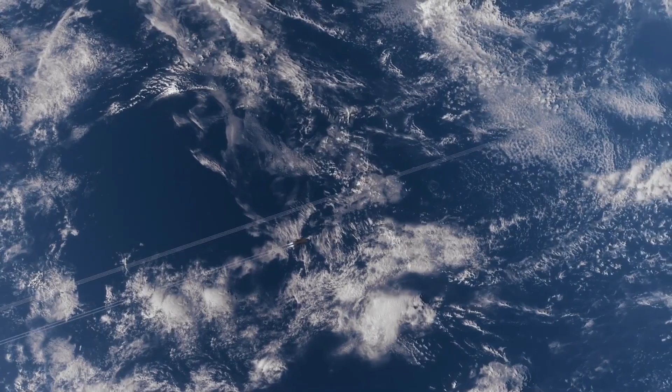Imagine blasting across the Atlantic in under 90 minutes, or jetting to the other side of the planet in just a few hours. It's the kind of travel you'd expect to find in a sci-fi film, but it's closer than you might think. Hypersonic technology that will have us covering vast distances at mind-bending speeds is more than a dream. It's on the verge of becoming a reality.

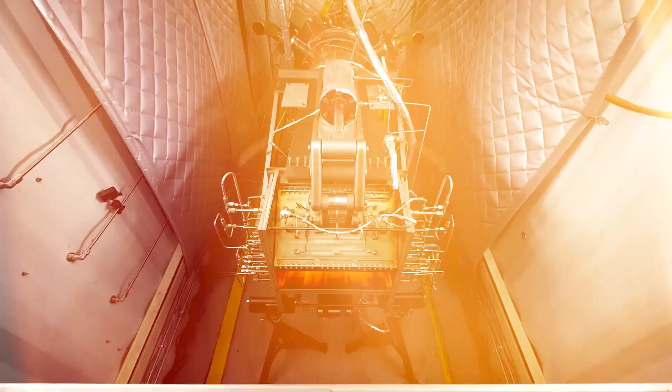Aviation pioneers like the Concorde once brought us closer to the concept, and ambitious plans like the Boeing 2707 hinted at it. Now, Hermeus, a company few have heard of until recently, is taking hypersonic to new heights with its revolutionary engine, the Chimera. Buckle up as we check out the technical wonder that is the Chimera and the game-changing impact it could have on aviation, travel, and even national defense.

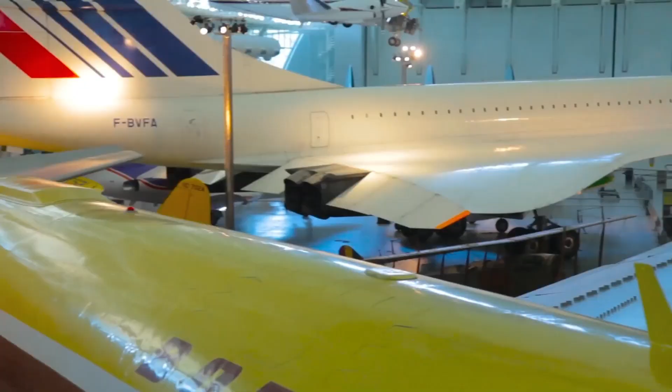The supersonic Concorde was a technological marvel in its day. With flights cruising at Mach 2, it drastically cut transatlantic travel time. However, the Concorde had limits, many of which stemmed from its own technology. High operational costs and low efficiency ultimately grounded this feat of engineering.

Meanwhile, in the 1970s, Boeing took a stab at the next frontier with its 2707 project, a concept for an American supersonic airliner that could reach Mach 3. Unfortunately, the 2707 never left the drawing board. But despite these setbacks, the dream of hypersonic flight lived on in the minds of engineers. Now, Hermeus has taken up the challenge.

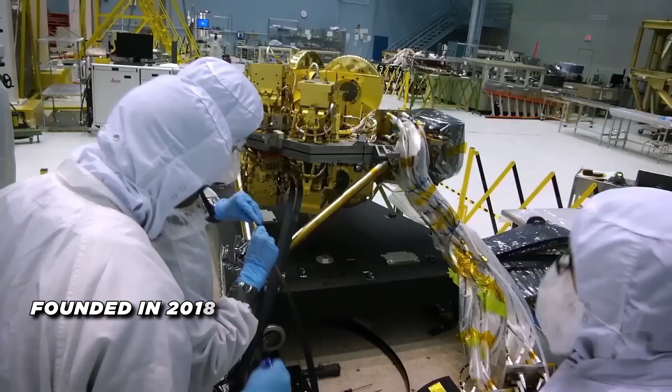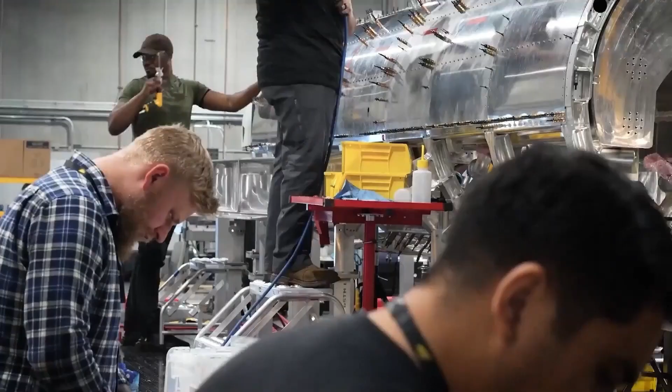Founded in 2018, Hermeus brought together a group of experts from aerospace giants like SpaceX and Blue Origin. These innovators weren't satisfied with small steps. They wanted to break new ground. Their solution? The Chimera Engine, a turbine-based combined cycle, or TBCC design that's practical, powerful, and groundbreaking.

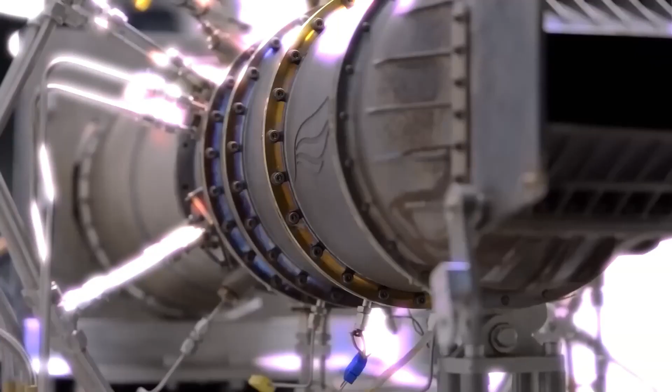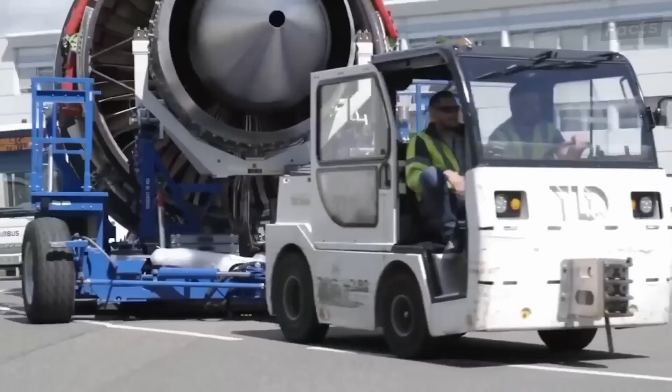Unlike experimental engines such as the scramjets used by NASA in aircraft like the X-43, the Chimera builds upon jet engine technology that's been tested and refined for decades. Hermeus's goal is to make hypersonic travel feasible, affordable, and adaptable. The Chimera is their ticket to achieving that.

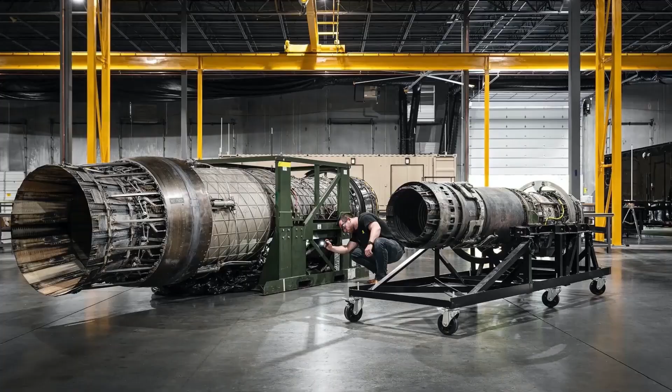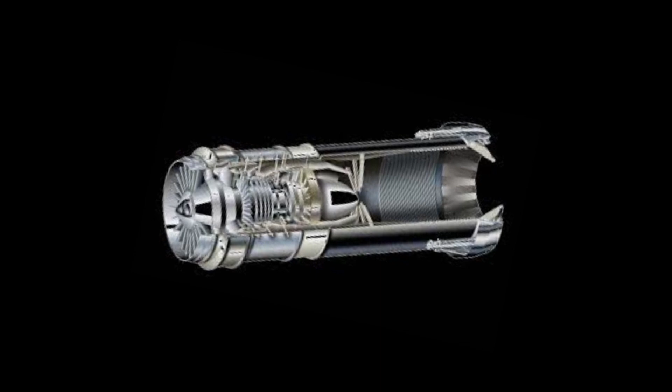So what makes the Chimera engine so special? It's a TBCC engine, meaning it combines different propulsion technologies to achieve maximum performance across a wide range of speeds. At lower speeds, it operates as a traditional turbojet, compressing incoming air, mixing it with fuel, and generating thrust through combustion. This approach leverages well-understood technology, giving Hermeus a strong foundation upon which to build.

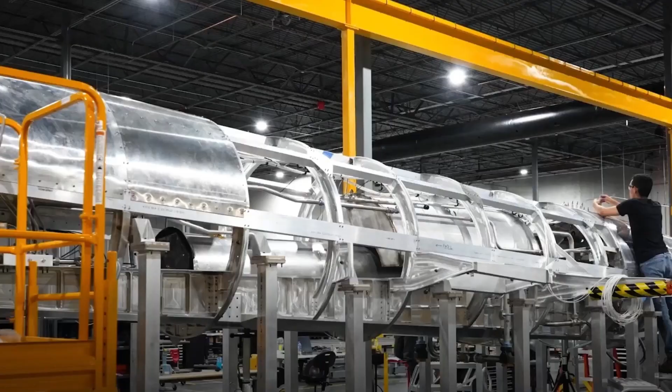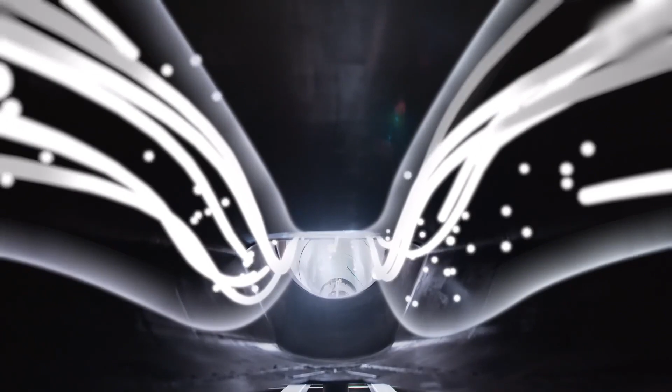But when the Chimera hits higher speeds, around Mach 3, it undergoes a transformation, switching to ramjet mode. Here, the incredible speed of the aircraft compresses the air inside the engine, and when the fuel ignites, the Chimera delivers the powerful thrust necessary for sustained hypersonic flight.

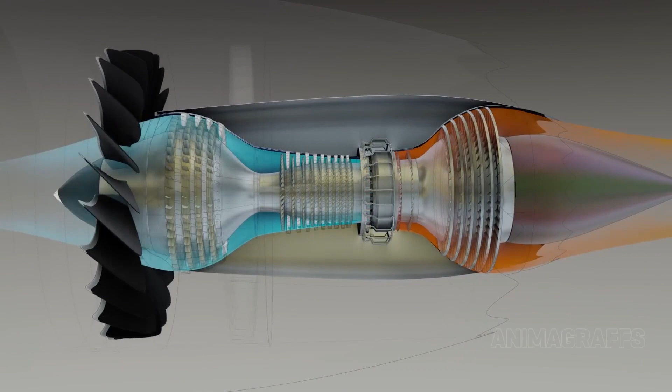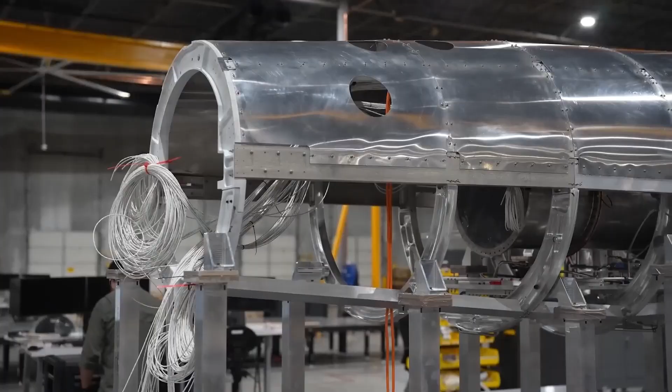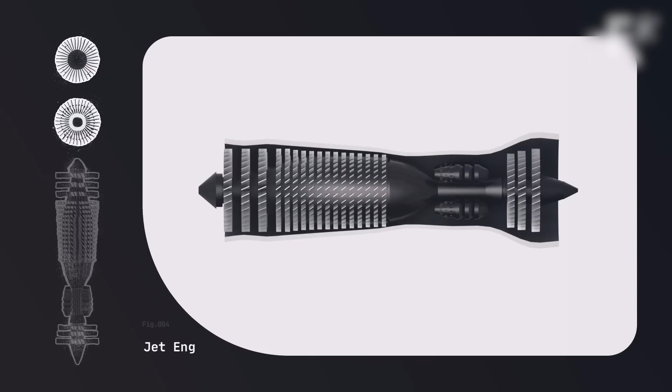Traditional turbojet engines encounter serious limitations at speeds around Mach 2 or Mach 3. At these speeds, the air entering the engine heats up significantly, stressing engine components and reducing performance. Hermeus has tackled this issue head-on with a proprietary pre-cooler system. This device rapidly lowers the temperature of incoming air, allowing the turbojet section of the Chimera to function effectively at speeds beyond what standard turbojets could handle.

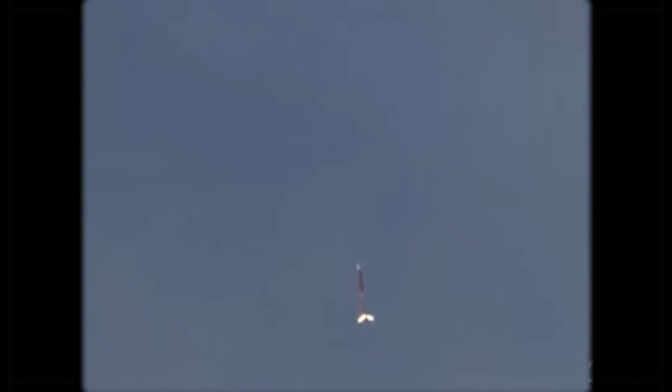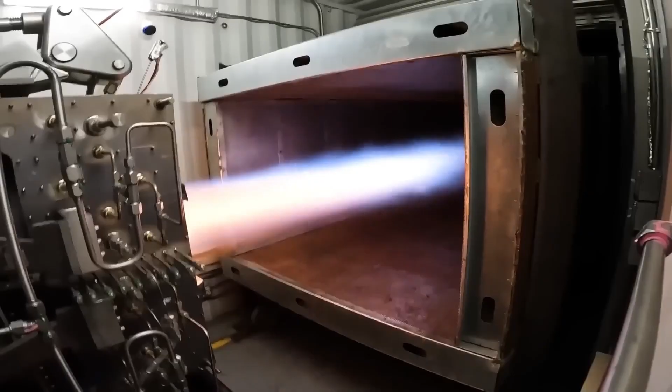By cooling the air before it enters the combustion chamber, the Chimera can sustain performance and maintain efficiency at hypersonic speeds. The brilliance of the Chimera is that it doesn't need rocket boosters or complicated scramjet systems to reach these speeds. Unlike some experimental hypersonic vehicles that require additional assistance to reach Mach 5, an aircraft powered by the Chimera engine can take off and land like a conventional jet. This not only simplifies operations, but also reduces costs.

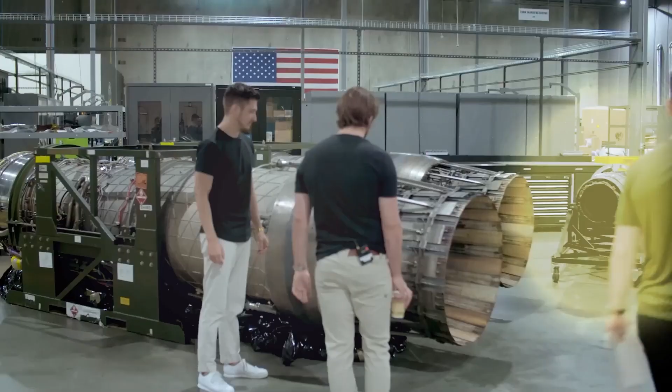Plus, the extreme temperatures and pressures associated with hypersonic flight demand advanced materials. Hermeus has responded by incorporating heat-resistant alloys such as Inconel 718 and cutting-edge 3D printing techniques to produce complex engine components. These innovations enable the Chimera to withstand the unique stresses of hypersonic travel.

The Chimera isn't just about speed, it's about practicality, reusability, and scalability. While other hypersonic technologies aim to set speed records, Hermeus is focused on creating a hypersonic engine that can be used repeatedly and adapted for a variety of applications. Imagine the impact on industries like rapid cargo transport, where time-sensitive shipments could be delivered at unprecedented speeds. Or consider the defense sector, where hypersonic capabilities could offer strategic advantages on a global scale.

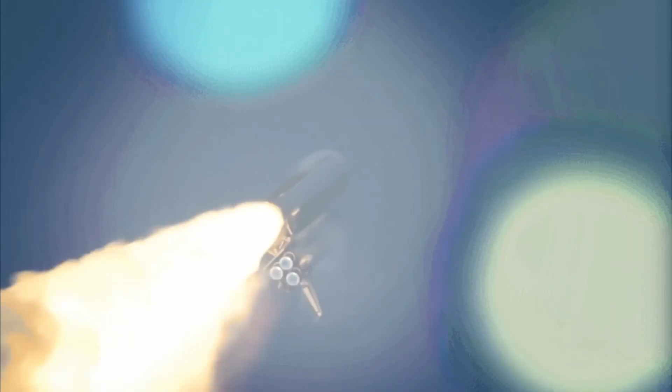The key to the Chimera's success lies in its reusability. Unlike one-off rockets or complex scramjets that are limited to a single use, the Chimera allows an aircraft to take off, fly at hypersonic speeds, and land again, ready for another mission. This lowers operational costs and opens up possibilities for faster, more frequent flights.

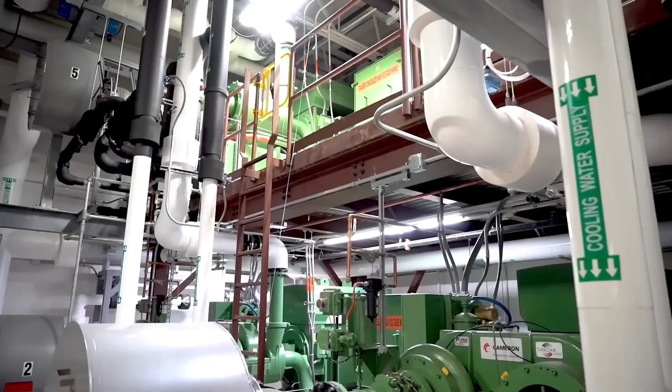By using proven turbojet technology and focusing on innovative solutions in areas like the pre-cooler, Hermeus aims to break down the high costs traditionally associated with hypersonic technology. Reaching speeds beyond Mach 5 generates immense heat, enough to melt or deform most conventional materials.

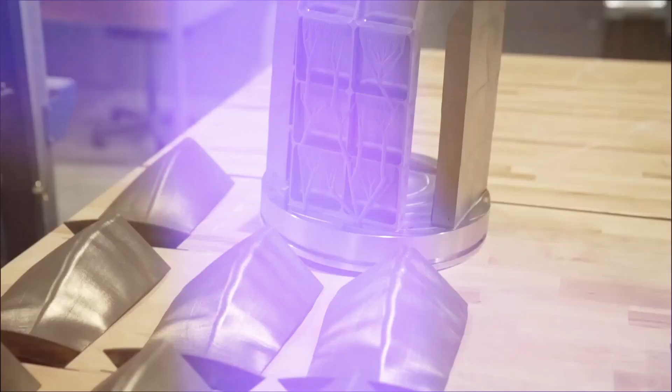Hermeus has taken advantage of advanced 3D printing to create engine parts that can endure these extreme conditions. The use of Inconel 718, a heat-resistant alloy, further boosts the engine's durability, allowing the Chimera to operate in environments that would destroy other engines. These technological advancements make hypersonic travel more practical and bring us closer to a future where hypersonic technology is widely accessible.

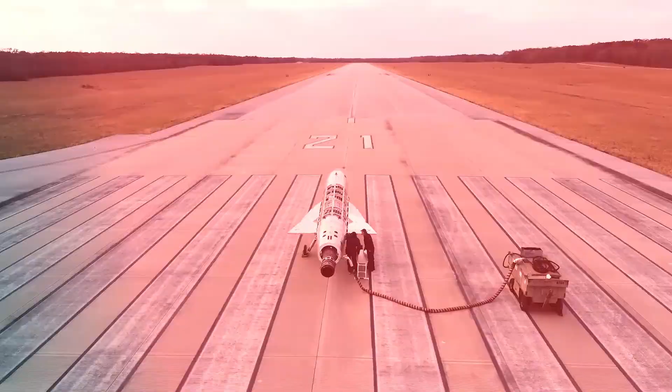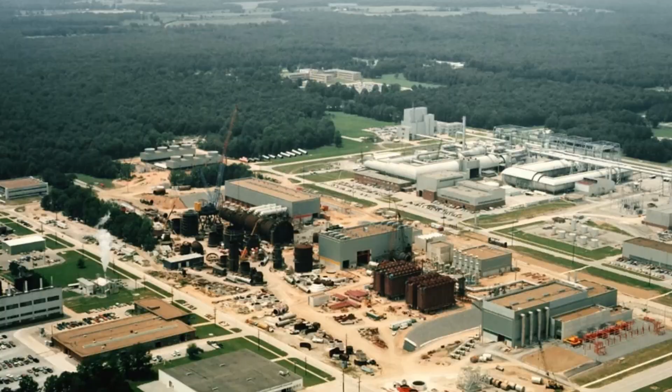The Chimera engine is part of a larger vision, embodied by Hermeus's Quarterhorse Mk1 program. Rather than building a single aircraft, Hermeus is developing a series of prototypes to refine and validate their technology. The Quarterhorse Mk1 is the latest iteration, designed specifically to test the Chimera engine's capabilities. In collaboration with the U.S. Air Force, Hermeus has conducted extensive ground tests at the Arnold Engineering Development Complex, examining the engine's performance across various conditions and ensuring its readiness for hypersonic flight.

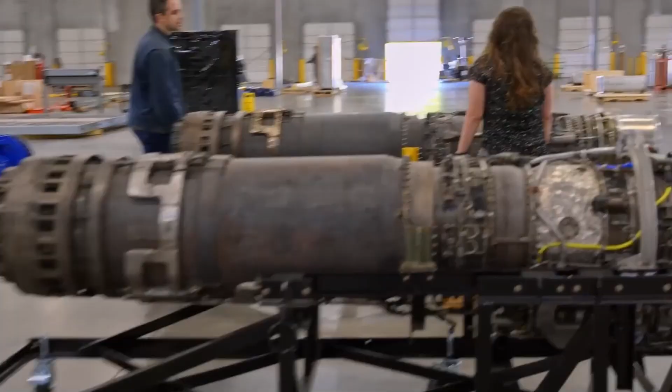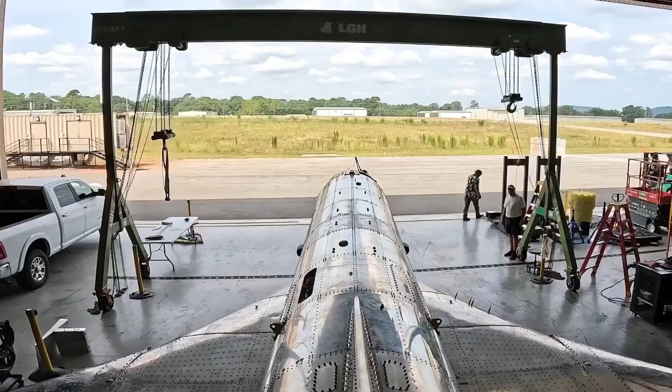The Quarterhorse Mk1 marks a significant milestone for Hermeus. This aircraft is equipped to take off and land autonomously, demonstrating the Chimera engine's potential for real-world applications. With each new test, the Quarterhorse pushes the boundaries of what's possible, aiming to surpass the speed records set by legends like the SR-71 Blackbird. But the objective here isn't merely to reach new speeds. Hermeus is gathering invaluable data on the aircraft's performance at the edges of its capabilities, data that will inform future designs.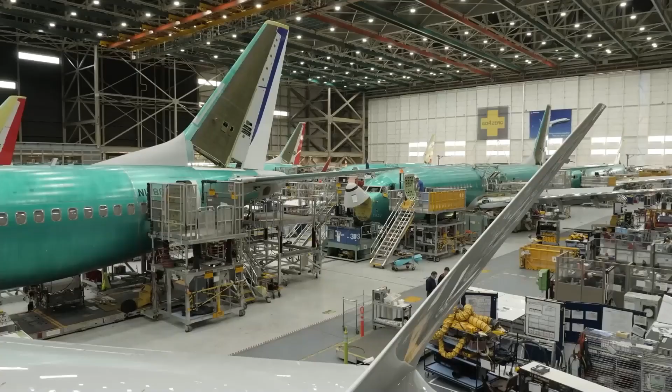Hermeus's rapid development philosophy allows them to build on each success. The lessons learned from the Quarterhorse Mk1 feed directly into future projects, such as the Dark Horse and Halcyon. Dark Horse, a stealthy hypersonic drone, is designed for defense applications, while Halcyon represents Hermeus's vision for commercial hypersonic travel. This iterative approach enables Hermeus to optimize its technology, taking hypersonic flight from the realm of experimental prototypes to scalable systems with real-world applications.

The Quarterhorse Mk1 isn't just about setting records, it's about pioneering a new era of aviation. The data gathered from each test supports Hermeus's broader goals, such as creating defense-focused aircraft that can operate at hypersonic speeds or building commercial airliners capable of crossing continents in a matter of hours. These advancements don't just push technological boundaries, they pave the way for a future where hypersonic flight is a practical tool for military, commercial, and logistical applications.

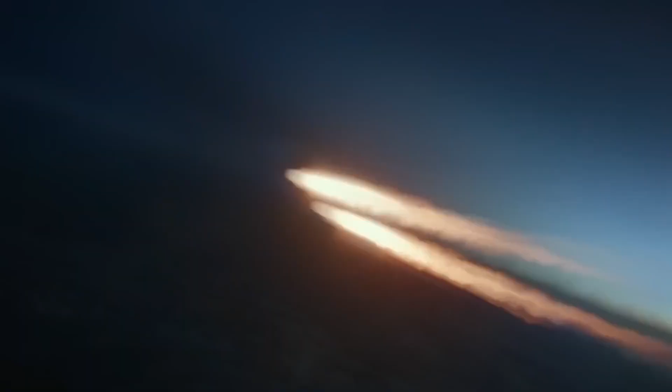As part of its broader strategy, Hermeus is developing Dark Horse, an unmanned hypersonic drone designed for intelligence, surveillance, and reconnaissance. Imagine needing to gather information on a situation halfway across the globe. With Dark Horse, it's like having a super-fast spy plane that can arrive, observe, and return before traditional aircraft could even take off. Dark Horse represents the potential for hypersonic technology to provide a new strategic edge, particularly in contested regions.

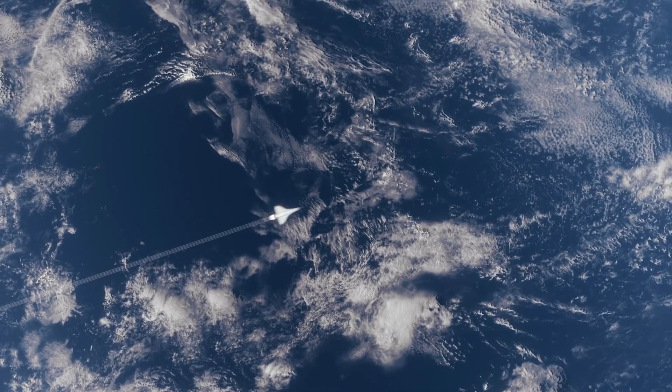Halcyon is another step in Hermeus's ambitious vision, a passenger aircraft that can make hypersonic travel accessible to the public. Imagine being able to fly from New York to Tokyo in under 2 hours. While hypersonic technology has often been seen as a tool for defense, Hermeus envisions a future where it reshapes commercial aviation as well, connecting people across vast distances with unprecedented speed.

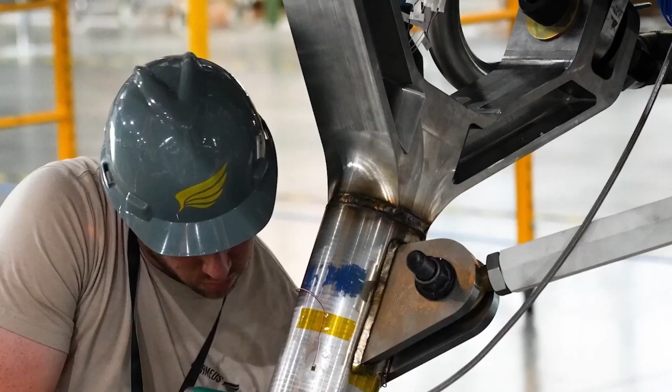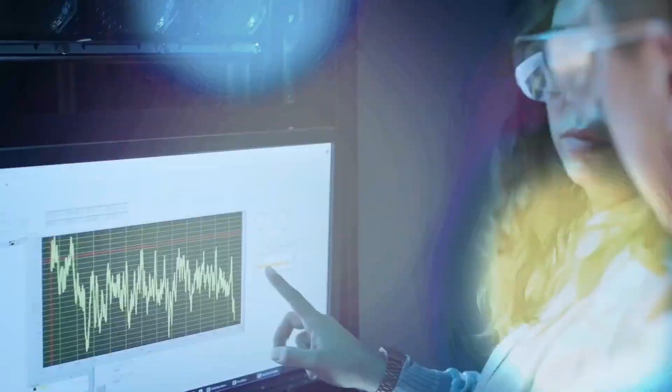The implications of hypersonic technology extend beyond travel and logistics. As global tensions rise, nations like China are developing hypersonic missiles capable of bypassing conventional defense systems. The United States is recognizing the urgency to advance its own hypersonic capabilities, not just to keep pace, but to lead. The Chimera engine and the advancements made through the Quarterhorse program could play a crucial role in future defense strategies, enabling the U.S. to counter hypersonic threats and maintain its technological edge.

Hypersonic weapons pose unique challenges due to their extreme speed, maneuverability, and unpredictable flight paths. The Chimera's advancements in speed, reusability, and control could directly contribute to the development of defensive countermeasures. Imagine a hypersonic drone capable of intercepting or neutralizing an incoming threat. Such capabilities could redefine military engagements and provide a strategic advantage in future conflicts.

The Quarterhorse's adaptability for autonomous flight also opens up new possibilities for rapid deployment. A hypersonic drone, launched on demand, could reach critical areas faster than any conventional aircraft, providing valuable intelligence or rapid response in contested areas. This technology could be a game changer for national security, allowing the United States to project power and gather intelligence with unprecedented speed.

The question remains, will hypersonic technology reshape commercial aviation, or will it find its primary role in defense? The answer has profound implications for how we travel, conduct trade, and approach global security. The path Hermeus is forging with the Chimera engine and the Quarterhorse program is more than a technological leap. It's a glimpse into a future where hypersonic flight is an integral part of our world.

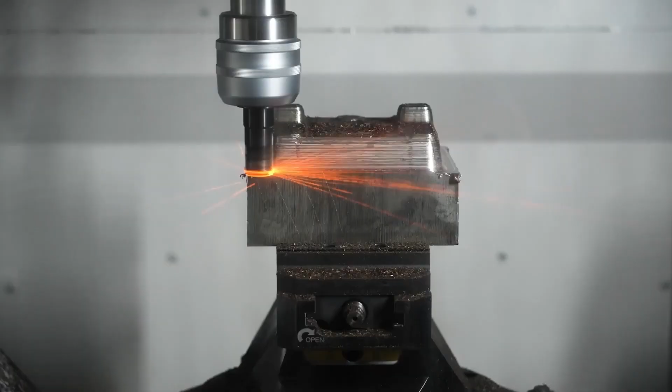As we watch Hermeus break new ground, we're left wondering what the next decade holds. Will sleek, hypersonic airliners transport us across continents, or will hypersonic weapons dominate the skies? Either way, the hypersonic revolution is here, and it's transforming more than just aviation. It's shaping the future.